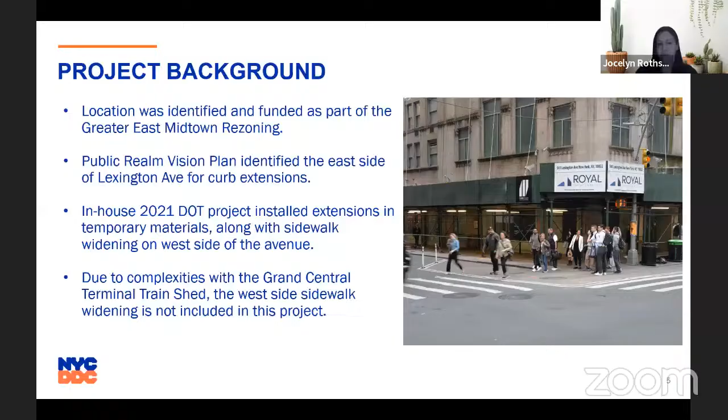Because this is design build, we broke our project up into 3 phases. Package 3 is going to be all the surface work - it's everything that you're going to see. It's what we're still working on in our design right now, which is mainly focused on accessibility, including curb extensions, ped ramp upgrades, incidental drainage, traffic signals, APS, wayfinding, pavement markings, etc.

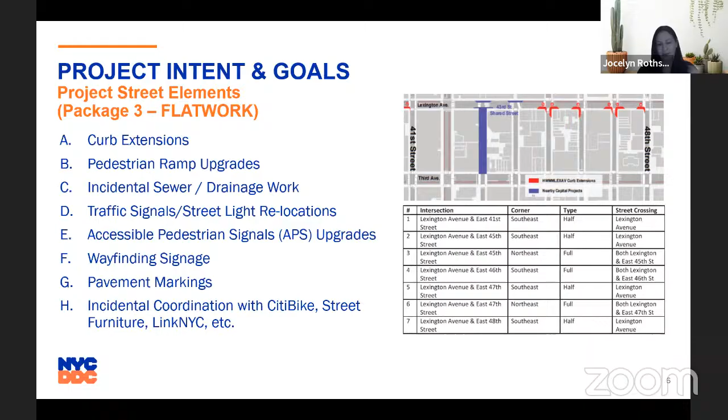The first 2 packages that we designed were all water main related. Those are what's currently in construction now, which I'm sure you've seen and heard about. And I believe you also got all of our mass mailing packages for 1 and 2 as well.

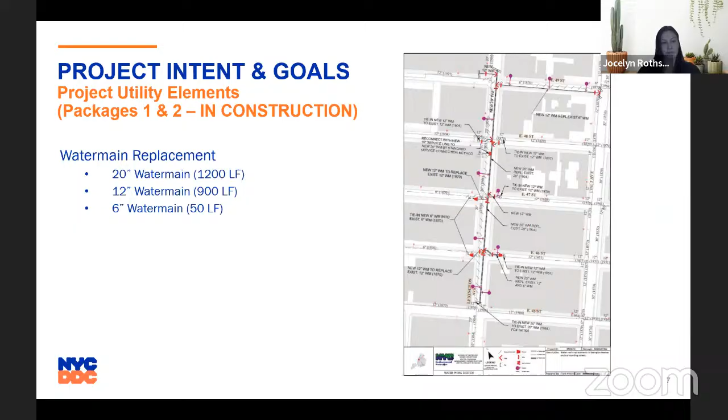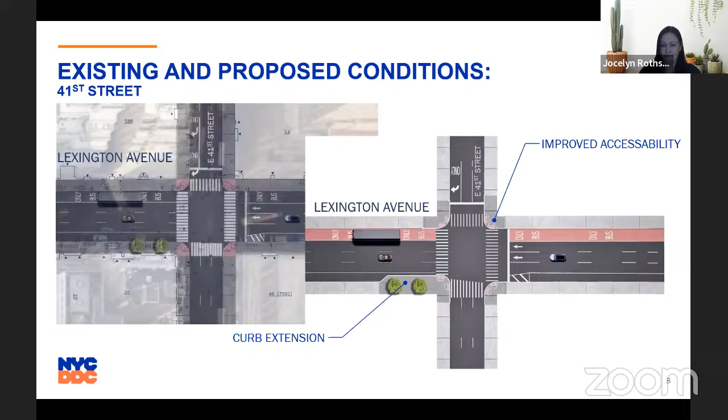All right, so for package 3, the surface work, what you'll see on the left is the existing conditions, and on the right is what's proposed. So at the intersection of 41st Street, the only real change will be the curb extension on the southeast corner. But we will also be removing that pink granite that's there currently and putting back standard, dark pigmented concrete.

From 45th to 46th, the changes will be the curb extensions again on the east side, both at 45th and 46th Street as shown. Same thing on 47th and 48th. One of the big things to note here is that the striped ped space on the west side of Lexington Avenue will remain.

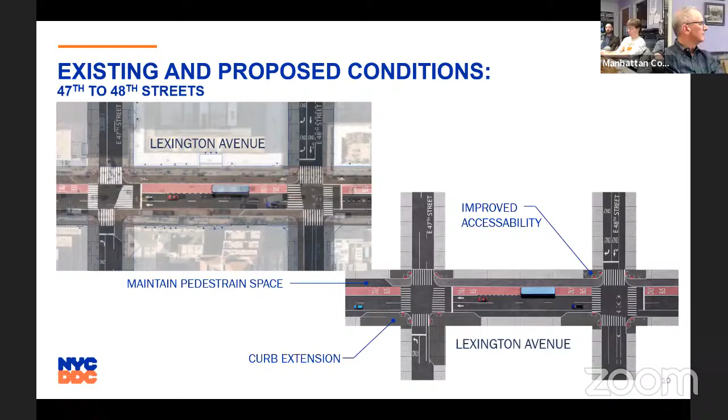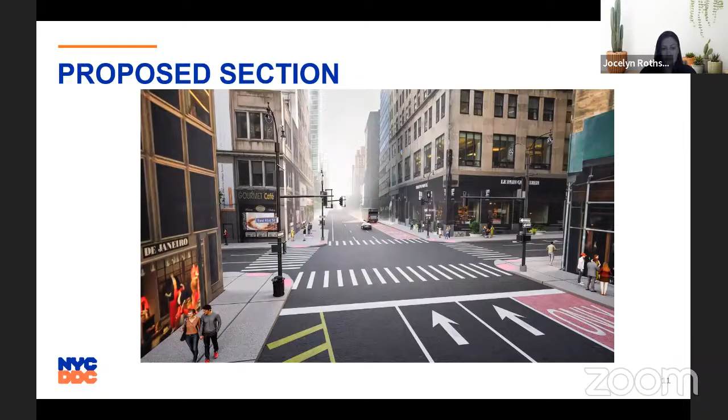So this is just a rendered section of what Lexington Avenue will look like when it's done. And following this, I also have a little video of a walkthrough of what it'll look like in the future.

Okay, I'll touch on some of the community impacts during construction, but if you have any questions, Diane is here - she is our amazing community contact. I'm sure you've noticed the temporary lane closures, temporary loss of parking, temporary bus relocations. I know there's a lot of active water main shutdowns that have been going on for a while now. And the biggest thing on this project, which I'm sure is affecting your community members, is the variable work hours.

We are working with DOT OCMC regularly, coordinating with them and making sure we have their approval on what work we can do during the day, what work we can do during the evening hours, and where that work can be. Diane has been sending out all of the work notices. I don't know if there's anything you want to say on that, Diane.

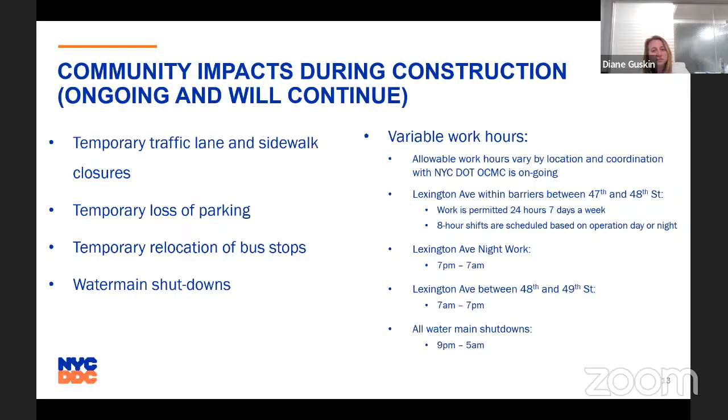Yes, sure. So for the water shutdowns, importantly, we're doing that at night due to the complexity of the area with the businesses. A standard water main shutdown would be 9 to 5 or 10 to 6 overnight. We've been requested by many businesses here, so we took that into consideration for the shutdowns especially. Thanks, Diane. No problem.

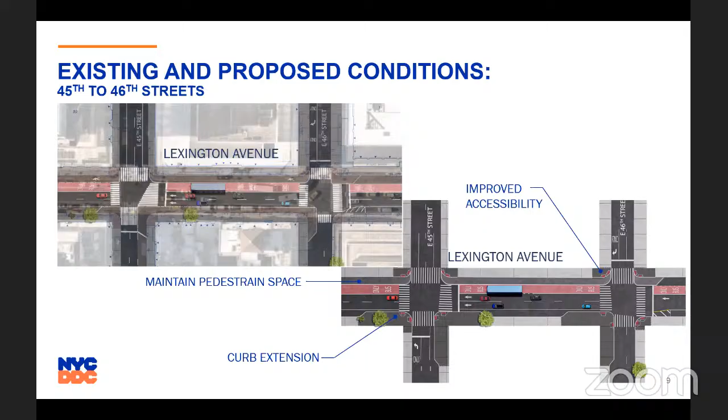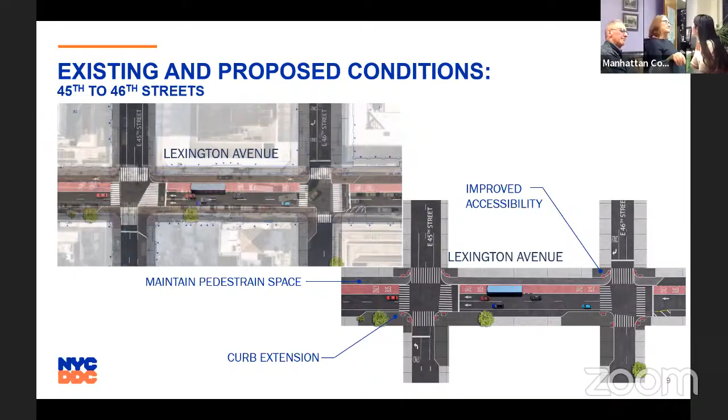Can you go back to the schedule really quickly that you put on screen?

I think there was a presentation maybe two months back about the shared street, which was 43rd and 44th. So it seems like this maybe is an extension or part of that. I'm wondering how that timeline sequences with the work that's being done for that project.

Hi, this is Marlene Nunez from DDC's Outreach Unit. That project is still currently in design and not expected to start. We don't anticipate overlap, but if there is, we will keep the community board updated of the timeline for that project. Is there an intersection between where the two projects cross, given they're both on Lexington and one seems to end on 44th and one starts on 45th? My understanding is that there's not, but I will follow up with the exact project location details and forward that to Marissa, the district manager.

Did you ever follow up on it? Yes. Okay, are there any comments from anybody on the public? Anybody?

So I guess for DDC, are you asking us to issue a resolution in support of the project? Is there some specific action on our part you're looking for? Yes, normally for presentations we do ask for a letter of support from the community board, which will be provided to the design team at DDC.